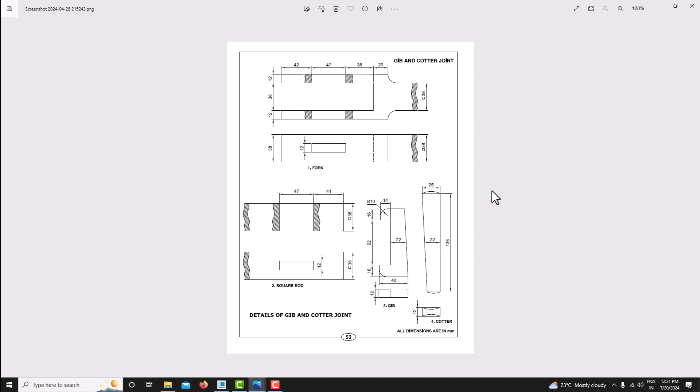Now, in this tutorial, we are going to see how to assemble this gib and cotter joint by using this orthographic view. We have two views, one is sectional front view and another one is top view.

First, we'll assemble this component by using Creo Parametric. For that, just go to the software. Now we are in the Creo Parametric software. For easy assembling, I'm just keeping this file on the left side, software on the right side.

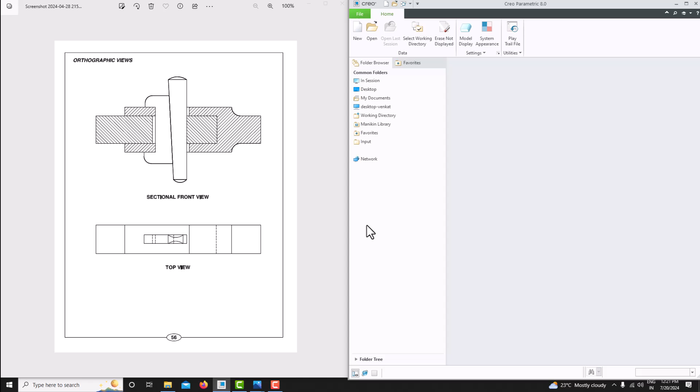Now we can see this sketch model also. Now we have modeled all the components. Now we'll assemble by using this one.

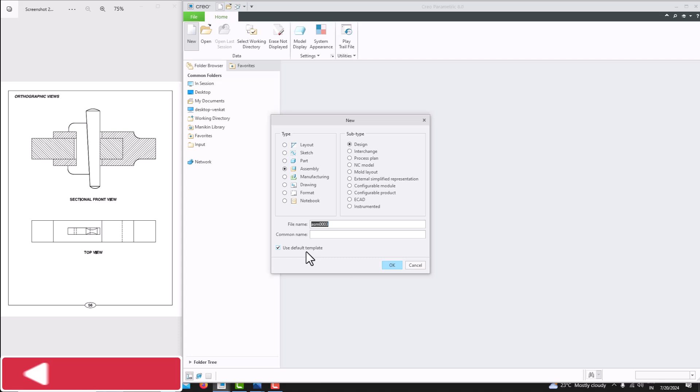For that, first go to New. In last part modeling, we have moved into the part, we have chosen this part 1. Now we need to assemble it. For that, we have to choose this Assembly option. So: design, assemble, then untick this 'use default template', say OK.

Now our units are in mm, so we have to choose mm, ns, assembly, design, absolute. Say OK. Now we are in the assembly module.

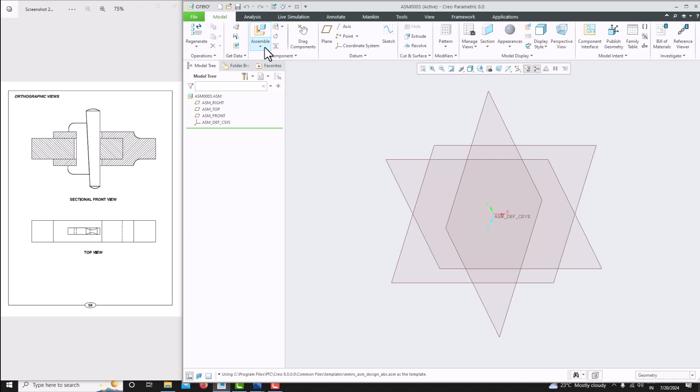We'll take the components one by one into the assembly module. We will constrain the components. For that, first go to Assemble. Just click this Assemble.

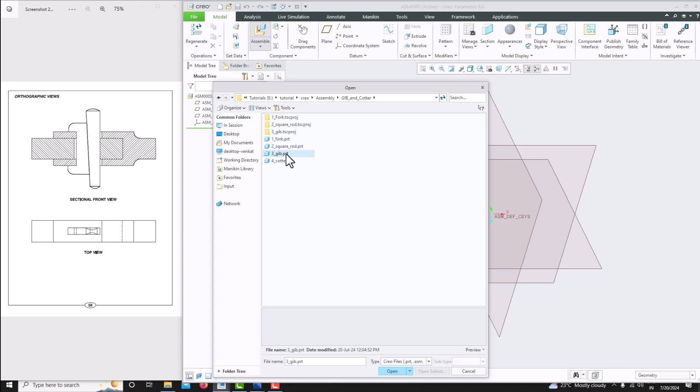Now our first component is the fork, so choose this fork. If you want to preview it, just rotate the component and preview it. The second component is the square rod, third one is the gib, and fourth one is the cotter.

First you import the fork. Just select this fork file, say Open. Now the fork has come into the software. It has 6 degrees of freedom, and we need to arrest all these 6 degrees of freedom.

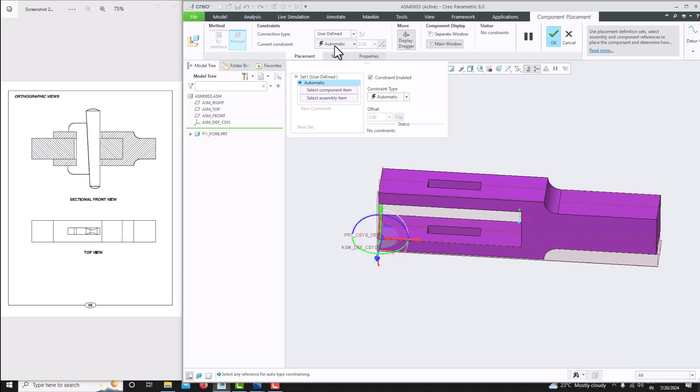For the first component, just go for Automatic. Instead, choose Default. What it will do is arrest all the degrees of freedom and move the component to the local coordinate system. Now here you can see it is fully constrained. Just say OK. Now we have imported the fork.

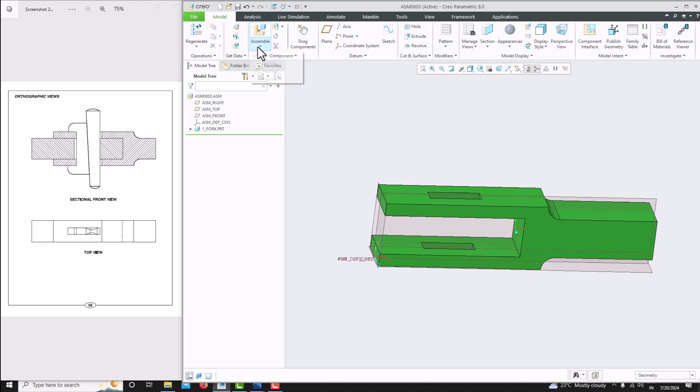Then we'll import the square rod and assemble it into this one. For that, just go to Assemble, choose the square rod. Yes, this is the square rod. Just open it. Now the square rod has come into the assembly module.

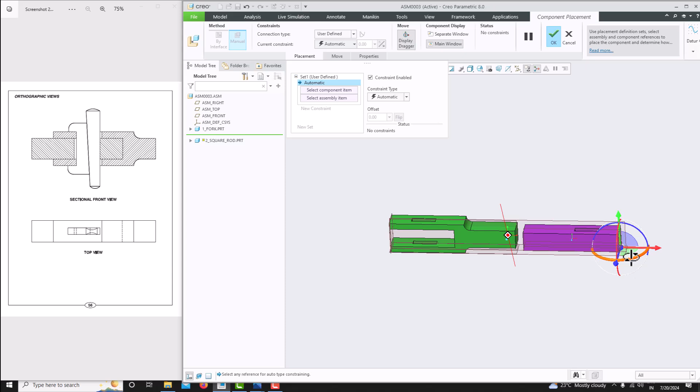Just translate this component by using this 3-arrow tool. We can translate it simply. Then by using this circular one, we can rotate the component. Now just simply translate this component to here for easily giving constraints.

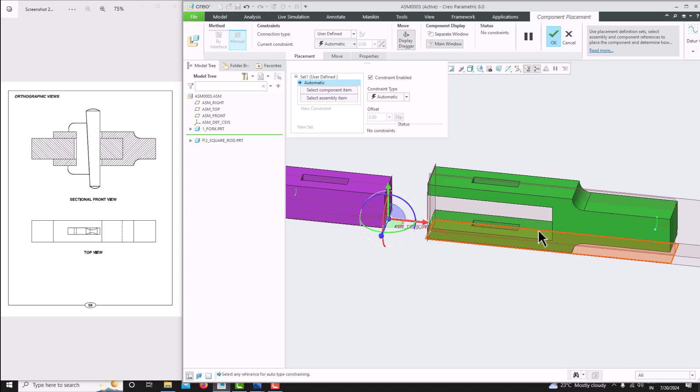Now just see, this surface has to be placed with this surface. Both the surfaces have to be coincident here. For that, just select the surface. Here you can see it is taking the first surface to match with this surface. Both should be coincident, so choose here instead of distance, coincident. Now we have made it coincident.

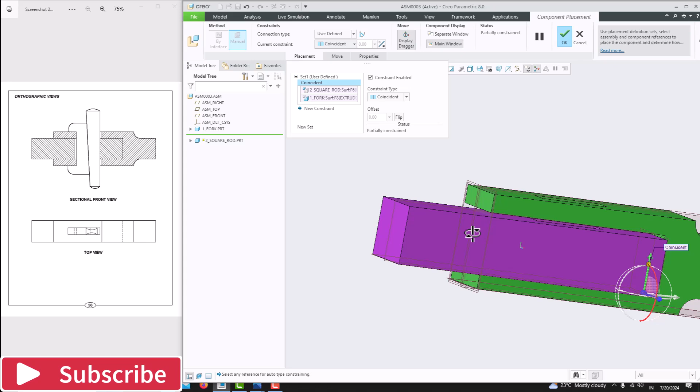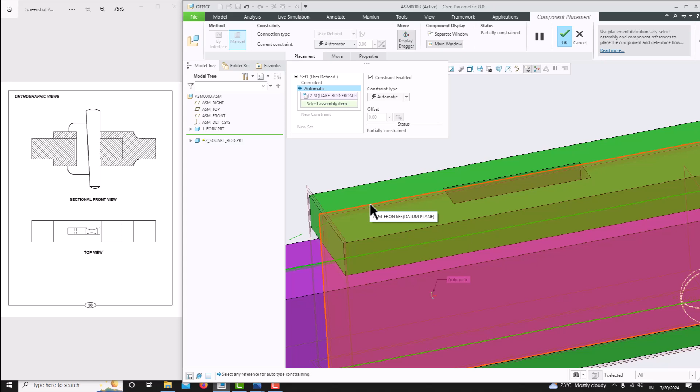Then the top surface has to be coincident with the top surface of the component. We can give, or we can go for the mid plane also. This mid plane has to be coincident with this mid plane. That is done.

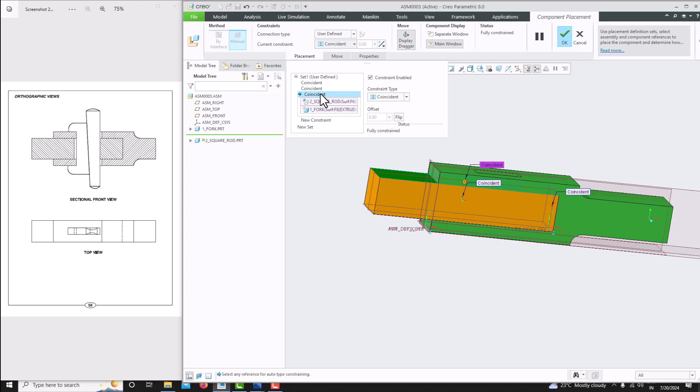Then this top surface has to be coincident with this top surface of this component. Now see, the component has changed into yellow color, which means it is fully constrained. Just see, once we have done 3 constraints, it becomes fully constrained. Then save, OK. Now the second component also we have assembled into here.

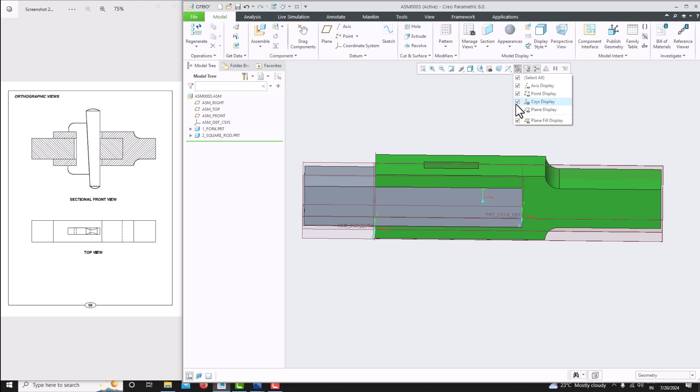Now the third one, we need to place this gib. For that, just import the gib, hide this plane for better viewing. Now just go to Assemble, select this gib file. This is the gib, just open it.

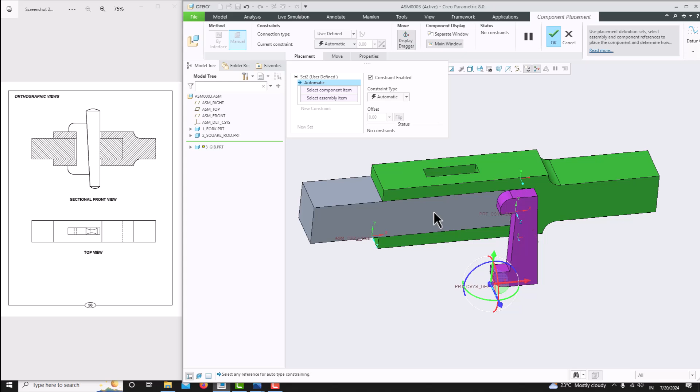Now the gib has come into our model. Just move your gib to here. Now we can give constraints. For that, first...

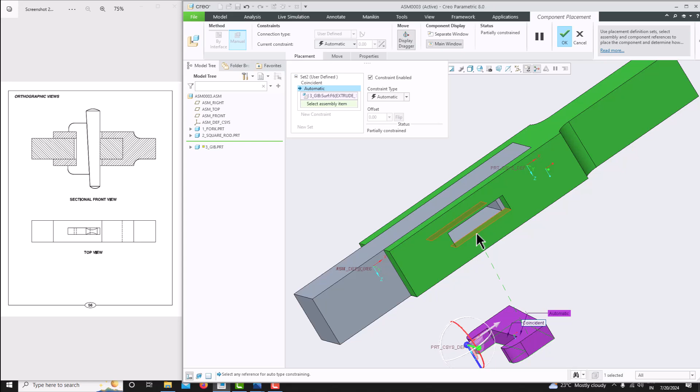Then this side surface has to be coincident with this side surface. Make it coincident here. And finally, we just want to make this flat surface coincident with this surface. Now we have made it fully constrained.

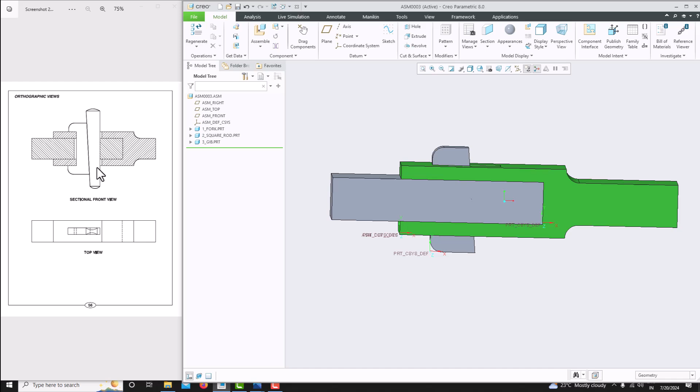The component has become yellow, meaning it is fully constrained. Just say OK. Then after that we just want to assemble this cotter. For that, just go here, Assemble, choose this fourth component as cotter, rotate it and check the component, just open it.

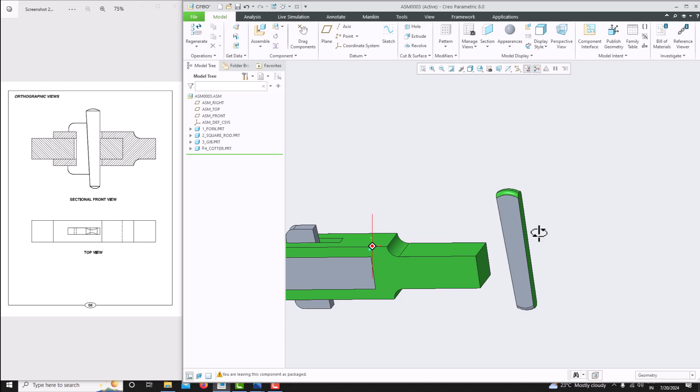This is our component. First you just confirm the component to check the color. So this is the longest edge and this is the straight edge surface. So this straight surface has to come to this side, so it is in the same direction only. Now just select this file, go for Edit.

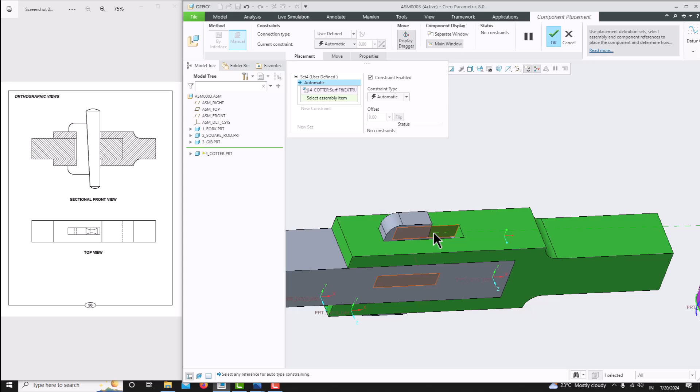Now switch on the plane also. First you give this flat surface constraint. Select the surface. This surface has to be coincident with this surface. So this, you make it coincident.

Then we switch on the plane. Just hide all this, switch on this plane. Now it is made to confirm. Just go for Edit.

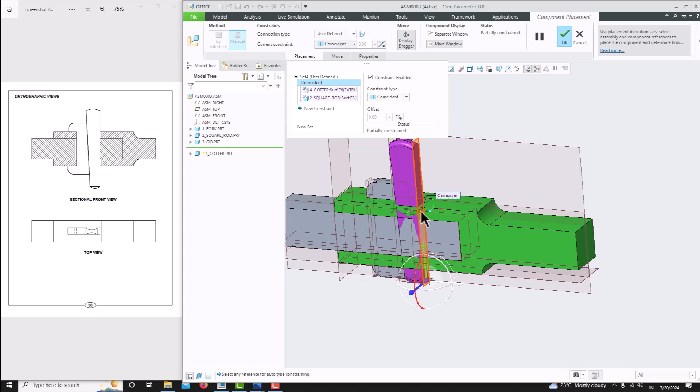Now it has a mid plane, so this mid plane has to be coincident with this mid plane of this object. So we don't have a mid plane, so we can give a distance constraint instead.

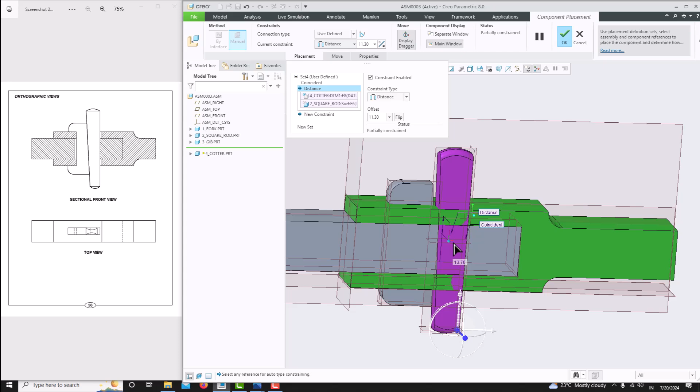Just select this surface and move it in the downward direction. Just make it a distance constraint, this is in the downward direction. The total, this is the square rod, which has a dimension of 38. So the distance is 38 divided by 2.

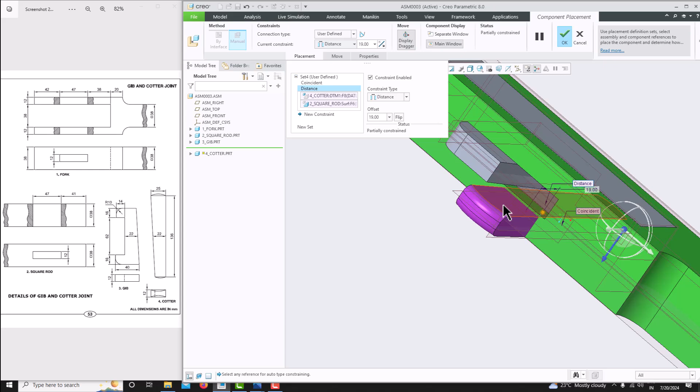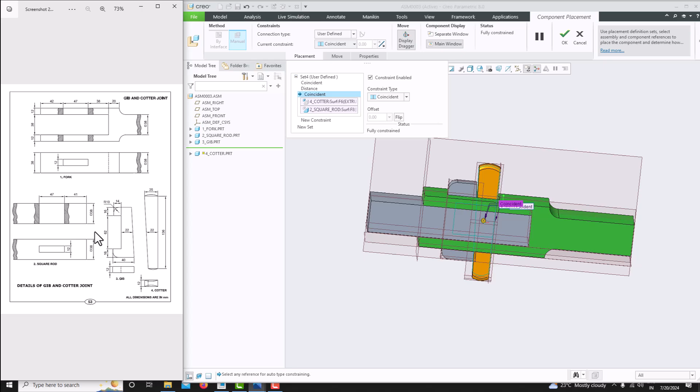Then finally we just want to make one more constraint, which is this surface has to be coincident with this surface. Now it is fully constrained. The distance constraint, you just modify a little more here.

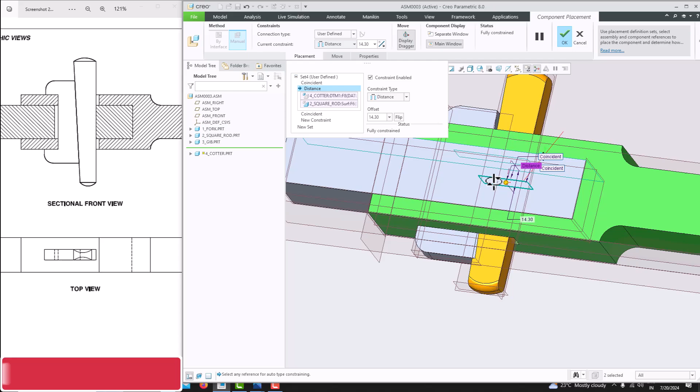Just confirm it. This is overlapping, that is because it is inserted into the component with a press fit.

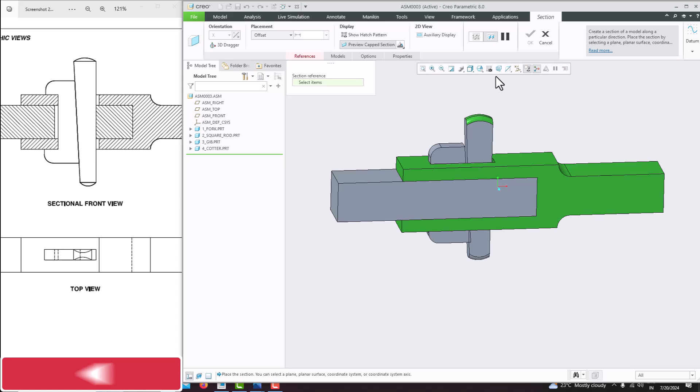So just go here, hide all the planes. Now we can go for cut section. Just go for the planar section, switch on any plane, select this one, this plane, say OK. Just hide all the planes. Here you can see, here it is getting overlapped.